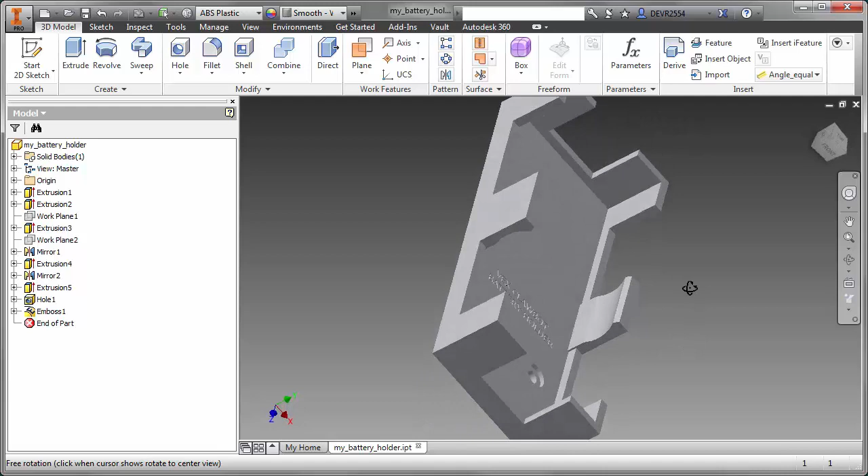In addition to the digital prototype of the robot and the new battery holder, the design team have asked me to document the part. I'm going to do that by creating a drawing and an English ANSI template. Again, if you're using metric, you can choose from a couple of templates here, probably ANSI or ISO will be the typical choices.

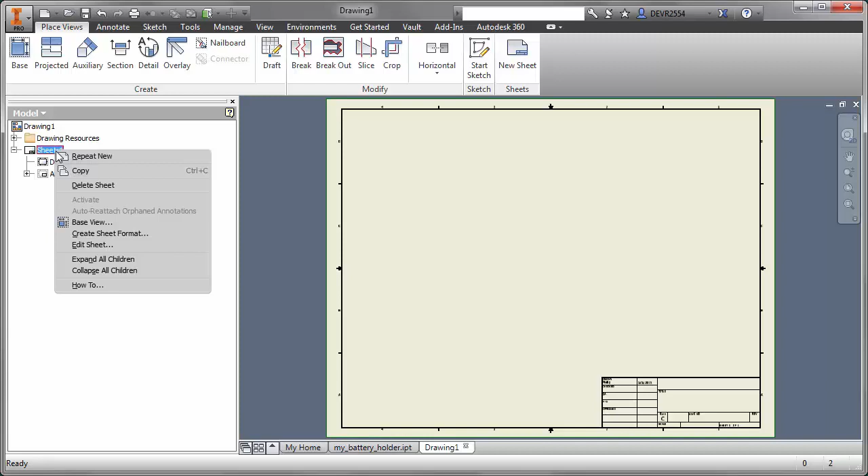I'm going to go back to English, ANSI, and create that new drawing. This piece of paper is a little big, so I'm going to change that. I'll edit it and change it from this current C size to an A4. When I do that, the title block becomes too large - it's the large option, so I'm going to delete that. Into Drawing Resources, I'll select the smaller of the two title blocks.

Eventually I'll use iProperties to put some text in that title block.

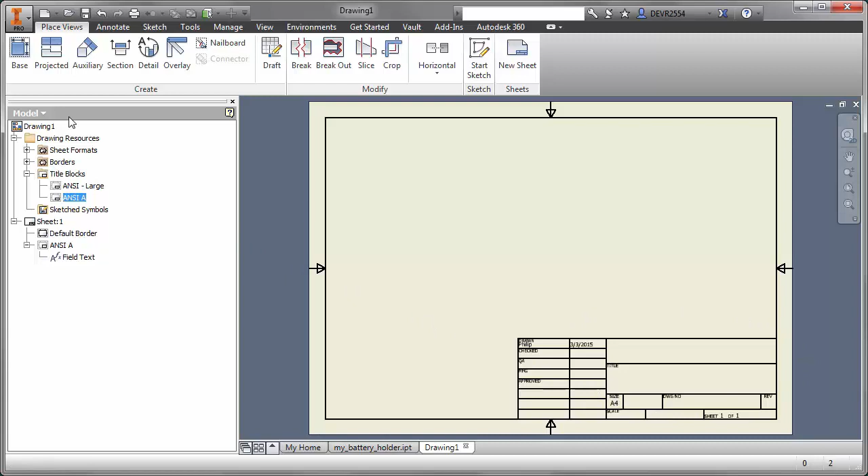Start by creating the base view. Now that's not the view I want, so I'm going to change that to right. That is the view that I want, and it's probably a little bit too big. Change the scale to 1 to 2 and start to place the views - in this case, 4 views: front, top, right side, and isometric. So we'll create those views.

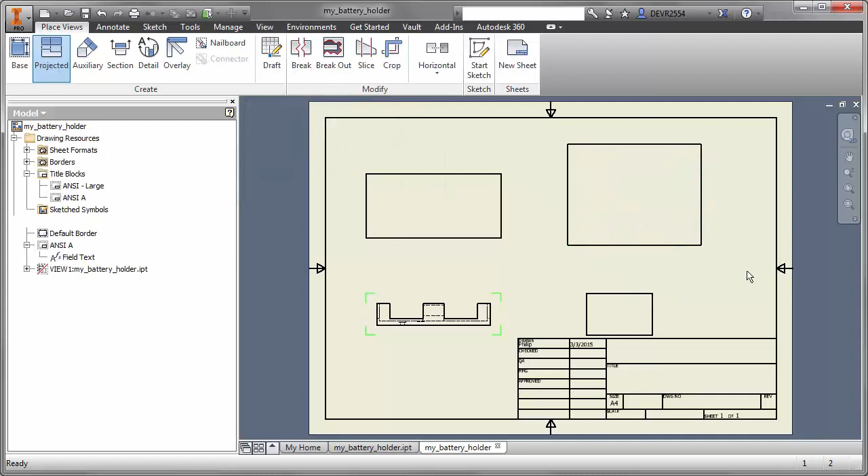Now when you first place the views, they may not be in the right location, so you can start to move those around, and indeed throughout the whole process you'll probably move them around quite a bit. I like to have the ISO as a shaded view, so I will edit that and select shaded.

To make it easier to dimension or annotate the battery clip holder, I'm actually going to create a section view. I'm going to put that over to the right hand side, so section, and just a short vertical line through the area where I want the section to be cut. Drag that over to the right.

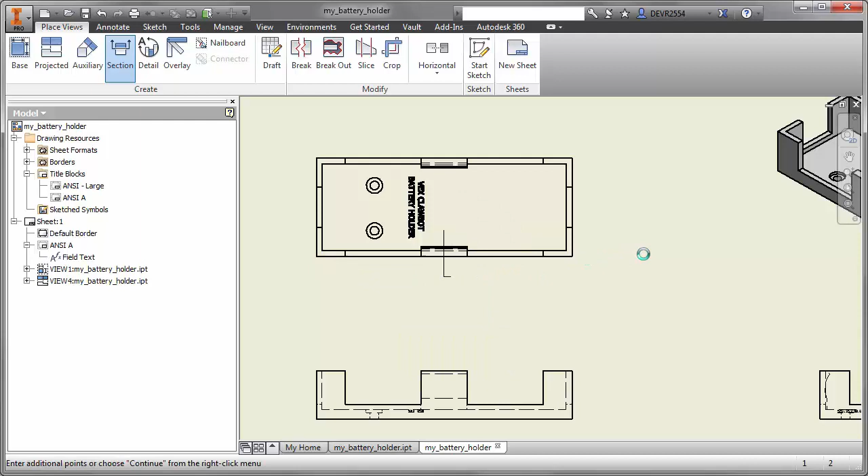Now, it's probably a bit small. There's going to be a few dimensions on there, so let's increase the size of that and go to 1 to 1. That should be better. So I now have that section view created.

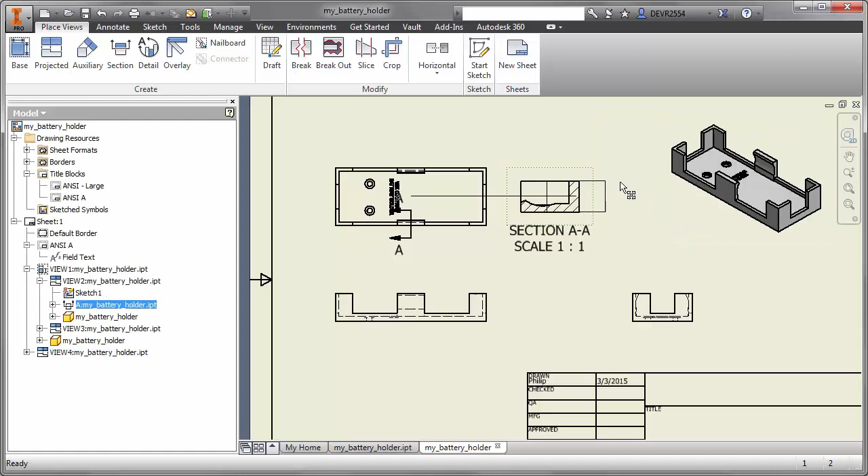Let's move the isometric over, give ourselves a little more space for dimensions.

So the next phase then will be to start annotation. I like to put center lines on first because very often you put dimensions to center lines, so it's a good idea to get those on the drawing first and then add the dimensions. Choose some of the obvious ones such as the holes and the arc.

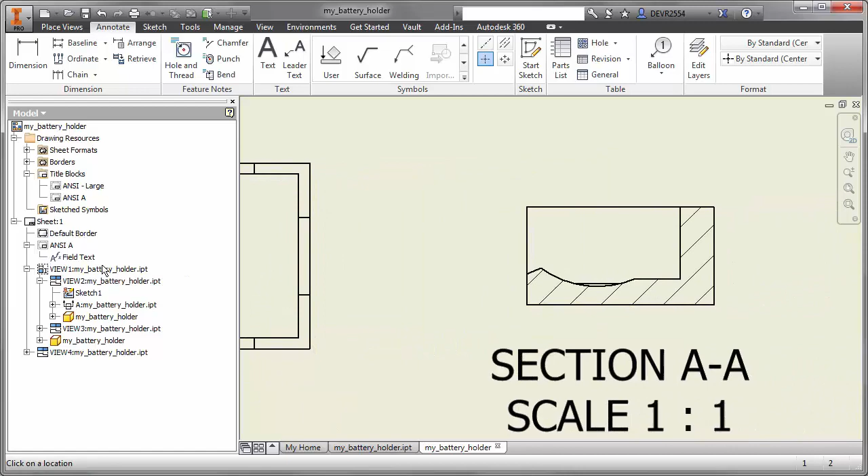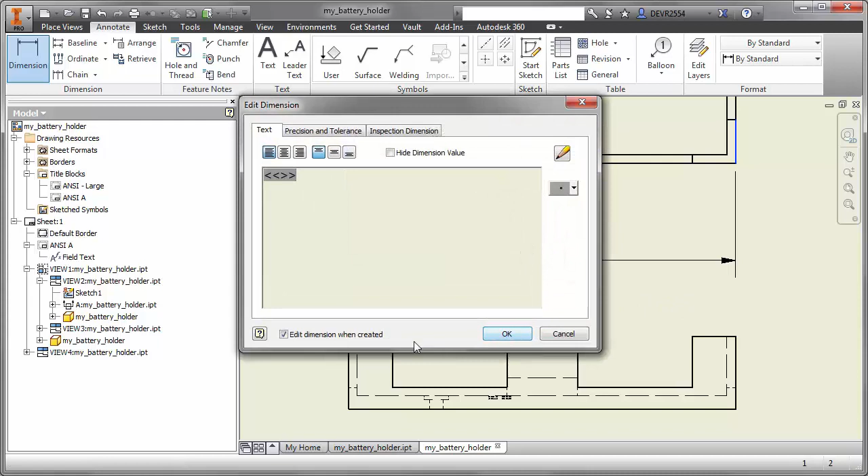I can then go about adding dimensions. Typically we would have overall length, width and height added. I like to start with that. And if you have a shared dimension, you should put it between the views. On the first dimension, remove that check mark from the Edit Dimension dialog box.

Keep adding dimensions, in this case the width. Notice I'm dragging them out until you see that dotted line - those are predefined distances away from the part. And you can see that right there. And zoom out.

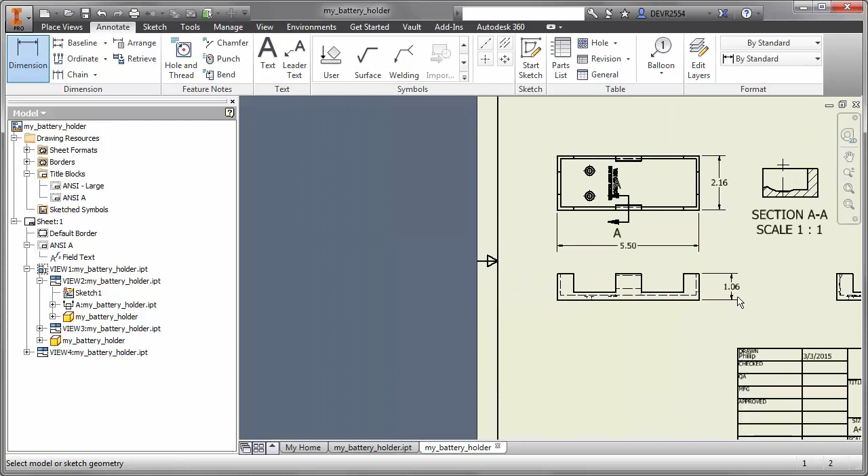I'm going to continue to add dimensions to this part. One thing you should remember is that where you have a hole, you would go to something like the Hole and Thread tool. Select on that feature, and all the information that you put in when you created the hole is listed.

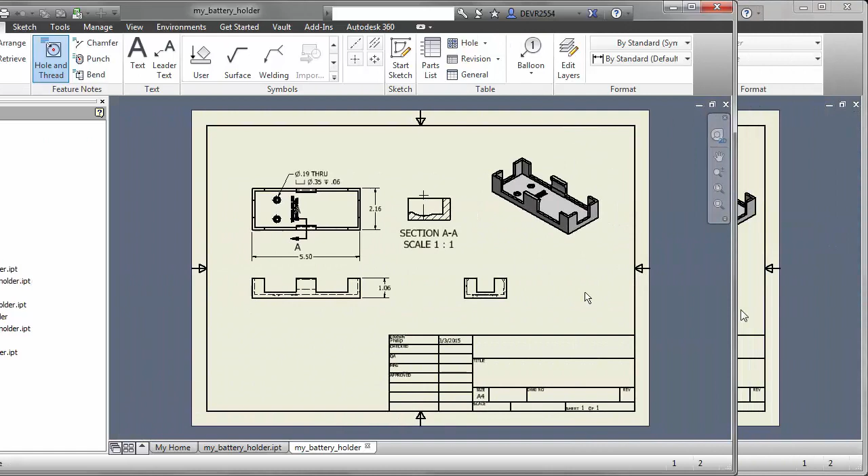I've added all dimensions and done a little bit of cleanup. I noticed that the arrowheads, for example, were over that text, so I just moved the section line back. It doesn't affect the view at all. And you can see the other dimensions that I've added.

To add text to the title block, go into the browser and select iProperties. On the Summary tab, a couple of areas we can add information. So for title, we'll call this Battery Holder. Under Author, I'll change that to Autodesk Inc.

I'm going to use that again, so I'm just going to copy that - Control C. Over to the Project tab. For Designer, I'll cut and paste that, so that's where the Autodesk Inc reappears. Part number, I was going to make one up, 1000_0001. And you'll notice down at the bottom there's some other information we can put in.

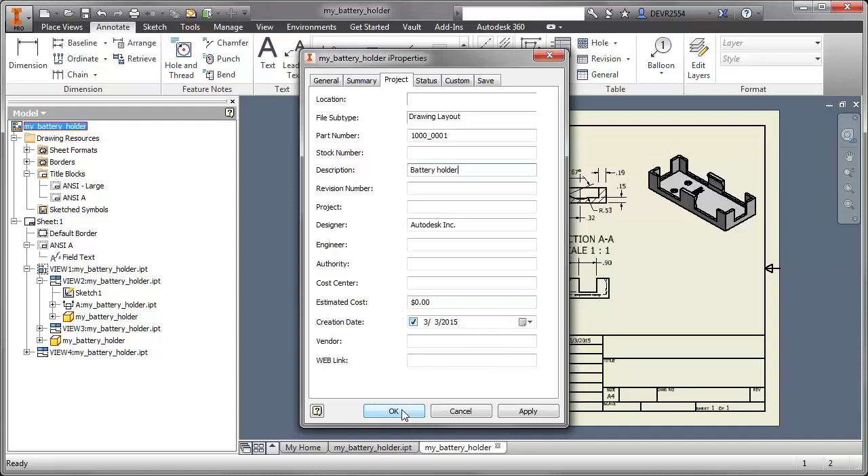Description, battery holder, and further down if you have a cost or a creation date that you want to change, you can do that there. And that adds the text to the title block. So the drawing is now complete.